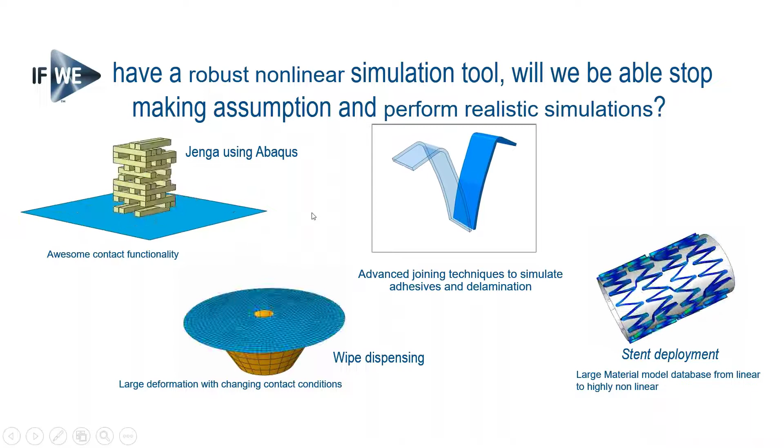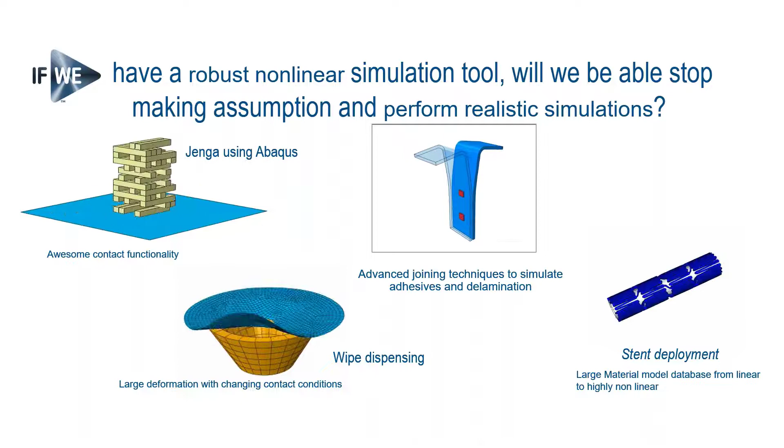The basic underlying idea here is that if we were to have a robust nonlinear simulation tool, we would be able to stop making assumptions and perform realistic simulations. Such a robust simulation tool would require extensive contact mechanics capability, the ability to deal with large deformations, and advanced material models.

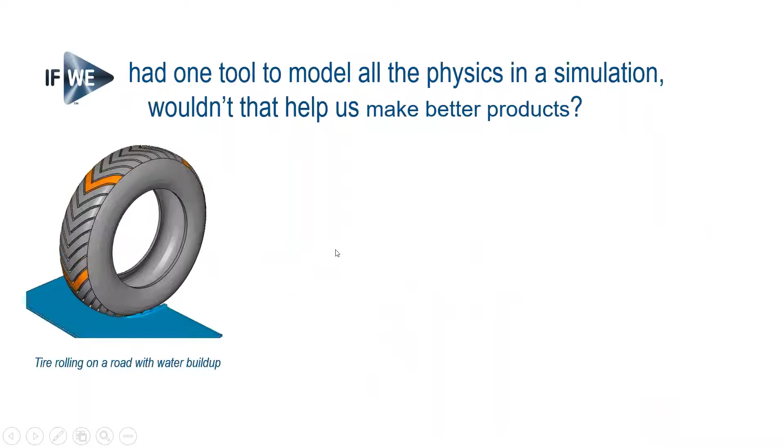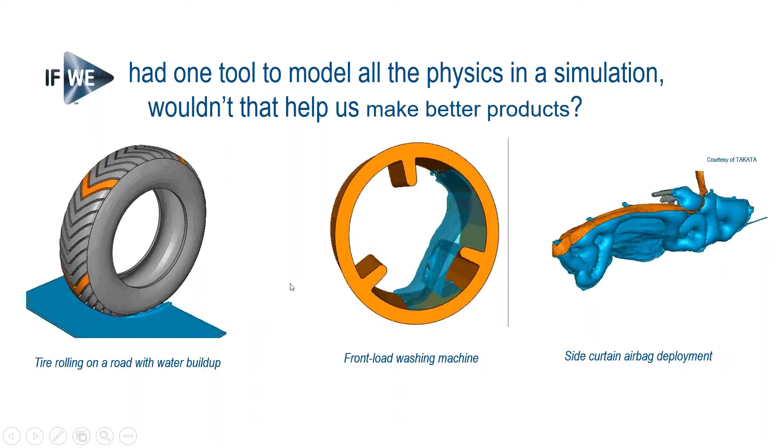If we were to have a single tool model that would also be able to incorporate all kinds of physics that our products will experience in the actual working environment, that would also help us to actually make better products.

And that's kind of the underlying idea about the activity at Dassault Systèmes. The vision, the target of our activities at Dassault Systèmes, is to make realistic simulation an integral business practice in order to explore, discover, and understand product life and nature. The aim with that is, of course, to reduce the need for costly physical testing, and for that purpose to allow us to save time and money, and more importantly, also combine that with improved quality.

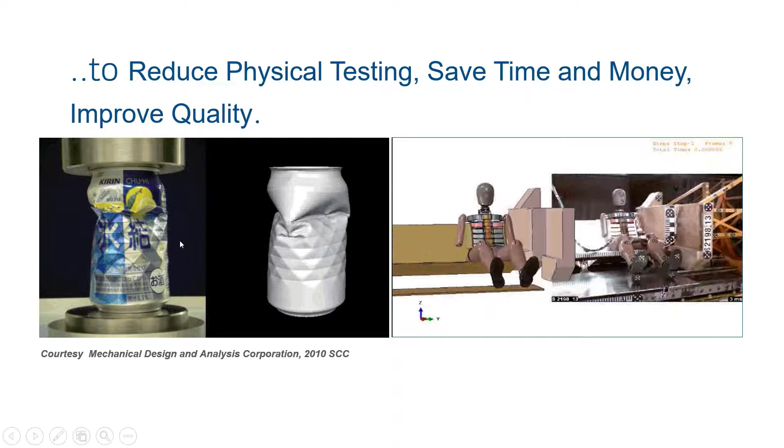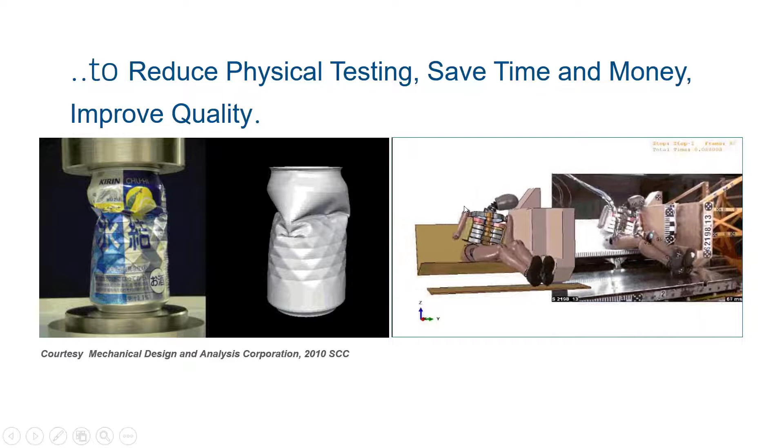What we see on the screen playing right now are a couple of examples from our customers. On the left-hand side, from Mechanical Design and Analysis Corporation in Japan, we see a comparison between a test and simulation of the crushing of an empty soda can or aluminum bottle. On the right-hand side, we see a crash dummy or side impact crash analysis. And both of these are, of course, as we can realize, tests and experiments which can be fairly expensive and cumbersome to perform.

SIMULIA, which I represent, is actually not a product or a company, but a brand of Dassault Systèmes. This brand is populated by products, which in this context are mostly Abaqus-based analysis products. We also have process management and optimization tools for managing parametric optimization. We have non-parametric optimization tools called Tosca for shape and topology optimization, and also, for the sake of completeness of product development, we have FE-Safe for assessing the durability aspect of product performance. It's actually more to it than that, but that's what we're going to talk about today.

Dassault Systèmes is a fairly big company. I'm sure these numbers are not necessarily updated, but we're more than 20,000 passionate people around the world. We're really a long-term driven company, which means we have majority shareholders that control the company, and as such we can undertake very long-term development projects. We have more than 290,000 customers around the world using our products.

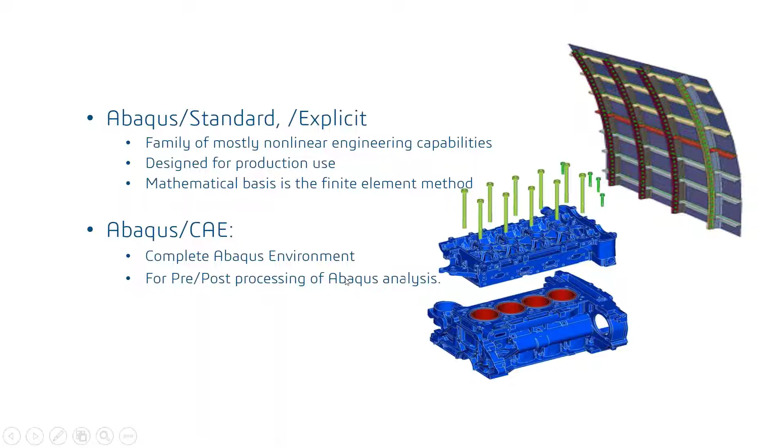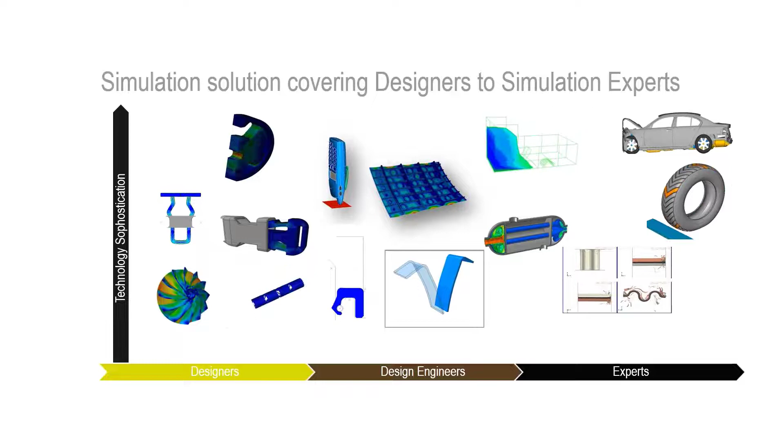We have a very good footprint across almost any industry today, which again is evidence of the generality and the quality and sophistication of the code. So we have a very comprehensive library of material models and capabilities that lends itself very well to almost any industry. I won't read them all out for you, but you can imagine that it will work for any industry that we know of today.

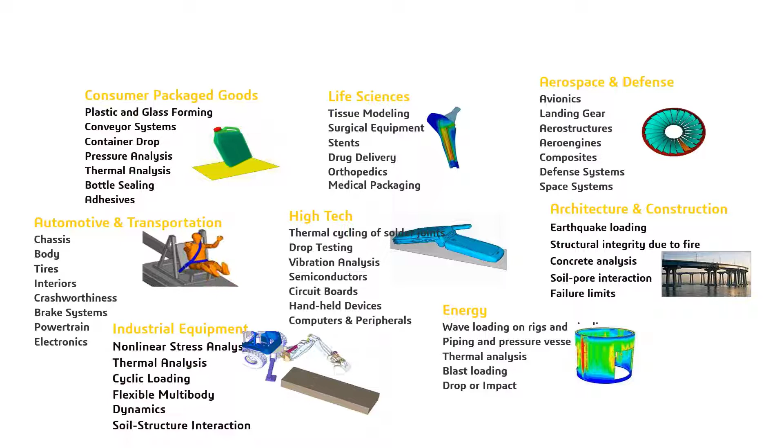So a little bit more specific then about our products. Abaqus CAE is the graphical user interface the users will interact with. It's a modular, well organized, and easy to learn user interface. It uses an object-action paradigm, navigation through a model tree. It's all fully customizable.

It's relatively new. The first version was released in 1999. This type of software takes a while to become really mature, but in terms of analysis pre-processing, it's really a very mature and capable tool that I think most of our users are finding to be a good partner in the simulation workflows.

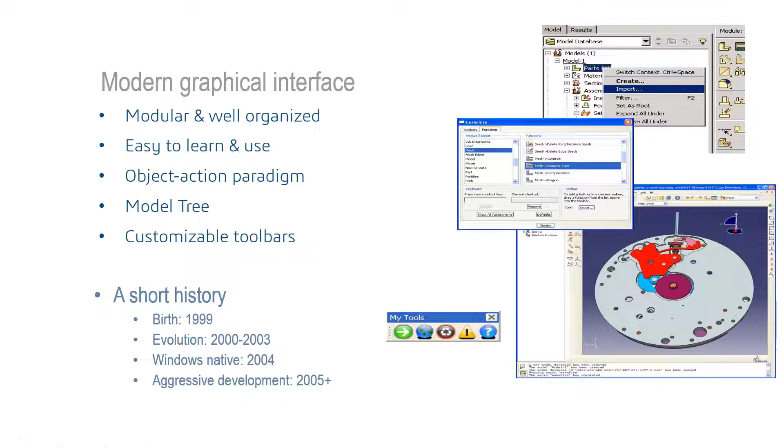Although it has a moderately competent geometry modeler in it, we oftentimes rely on powerful CAD interfaces to allow company-wide CAD geometries to be imported and potentially repaired or modified to meet the specific requirements for setting up simulations, which could be adding pieces of geometry, but it also could be simplifying, reducing undesired aspects of the geometry which don't really contribute to the value of the simulation.

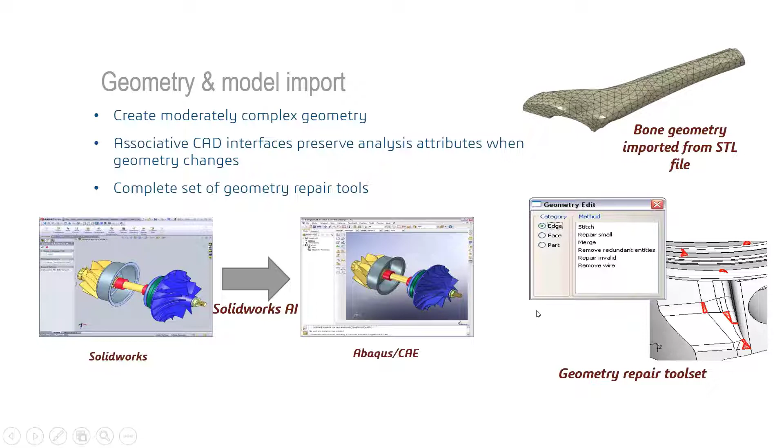Structural simulations, as we see it here, oftentimes involve, most of the time involve, meshing. So meshing capabilities are critical. For TET meshing in 3D, there is a fully automated free meshing algorithm that will mesh any geometry. We have a semi-automatic hex meshing capability that will require some amount of user intervention to split the geometry into simpler topological cells to be able to produce hexahedral element shapes, which generally are more efficient than tetrahedral elements, but on the other hand, it takes a longer time to generate the mesh.

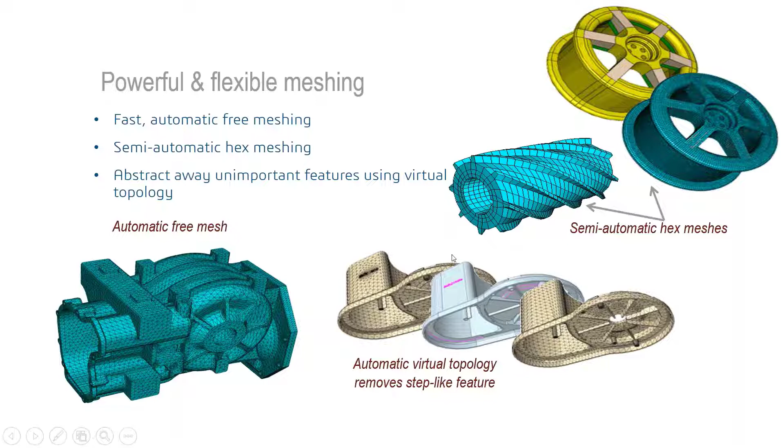Abaqus CAE also contains a powerful tool for visualization of the results, which of course is an important aspect of doing simulations. It's capable of managing large models, providing for transparency plots, view cuts, probing, animations, synchronized viewports, XY plots, and so forth. It's a very attractive way of actually presenting the results we produce with our simulations.

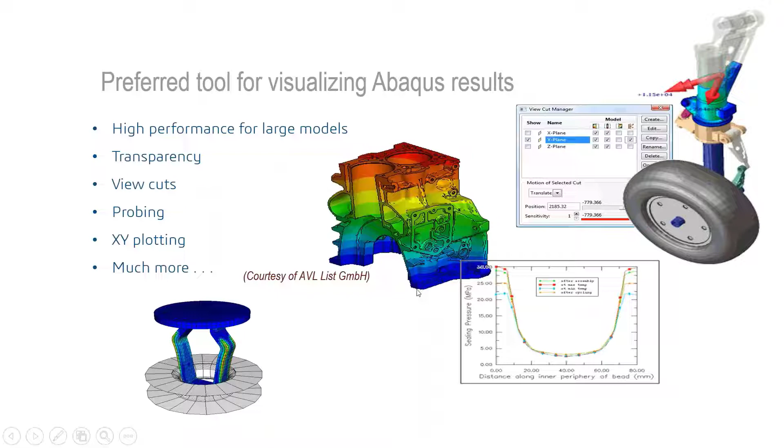It's also, as I mentioned, customizable, and we use Python as a third-party scripting tool for enhancing or capturing workflows. So the simplest way is really to use a macro mechanism. Repetitive tasks can easily be recorded with macros, which are Python journal commands from the process we are capturing, which can be edited and enhanced, of course.

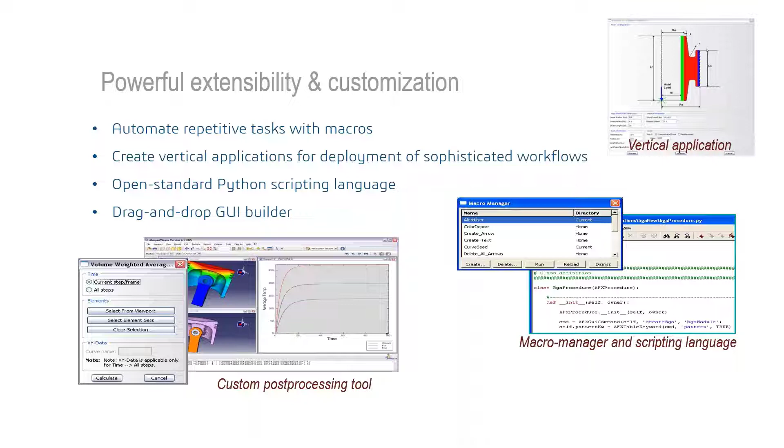We can further build new functionality, add functionality on top of existing general purpose applications. We offer an API for creating additional graphical user interfaces. The simplest one is really just an interactive drag and drop GUI builder. We call it Really Simple GUI. The user can, by drag and drop operations, create new dialog boxes which can be used to provide the user a nice interface for adding data.

As an example, we see on the left-hand side here the out-of-the-box view of Abaqus CAE. On the right-hand side, we see the Abaqus Knee Simulator, which is a customization where, as you can see, there is a knee joint for presumably an implant of some kind, where all the other aspects have been hidden, and the user of this application will only see the aspects pertinent to the current model, can edit data properties and submit simulation and immediately go to view the results.

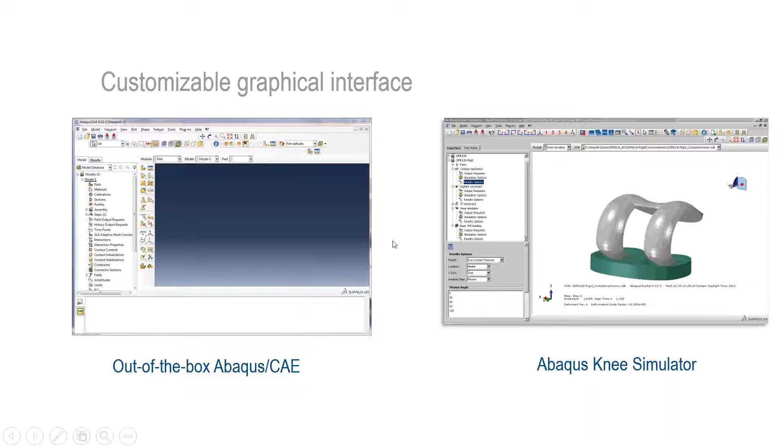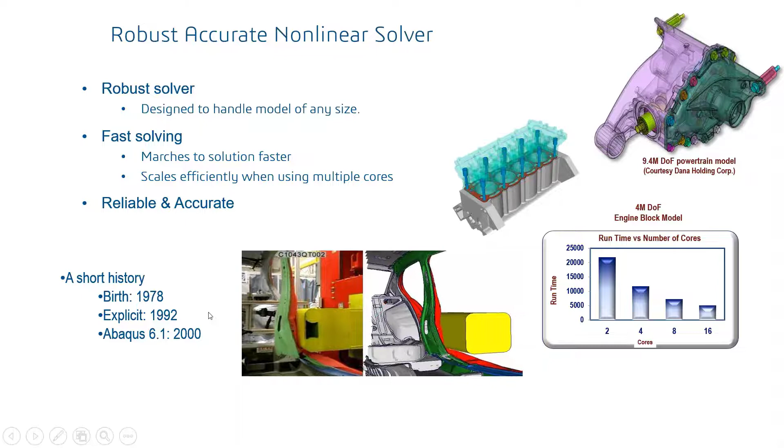So our analysis products, a little bit more in detail. We rely on robust solver technology. We constantly update the solver technology also to be effectively used in the current hardware. So there's constant ongoing work for adjusting application file databases and so forth to be working efficiently with the current hardware environment. The first version of the solver code was in 1978, and in the early 2000s we made the previous big change in code structure for allowing more native Windows applications and so forth.

This is one example of maybe one of the more prestigious customers, BMW, which since the last plus 15 years has come a very long way towards the goal to eliminate prototype hardware testing. So they assign very high quality to the predictive simulations in order to avoid having to do very expensive prototype testing. As far as I know, hardware testing in terms of crash analysis doesn't really occur until the pre-production series are available.

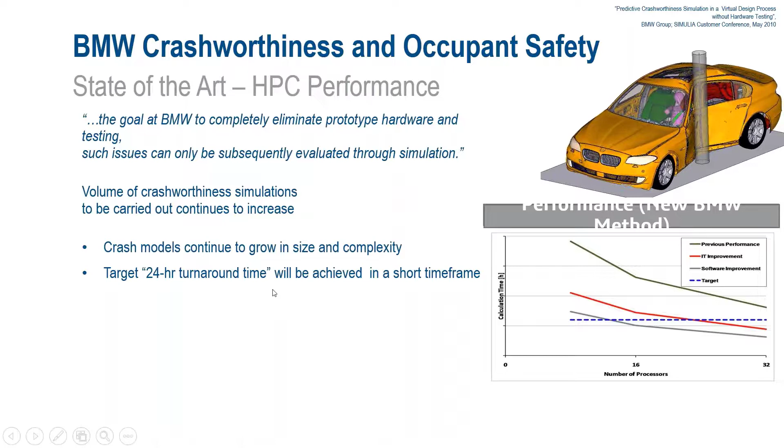Central to a powerful simulation tool is the availability of material models used in the engineering community. We have an extremely extensive library of material models, including rubbers, metals, composites, linear and non-linear material, isotropic or anisotropic.

We have dependence on loading rates and temperature dependencies, plus comprehensive offerings for modeling soils, rocks, concrete, ceramics, pastes and polymers, and strong capability within damage and failure modeling. I'll come back to that later. Importantly, these are material models - we do not necessarily provide calibrated data, which could be a challenge for advanced simulations.

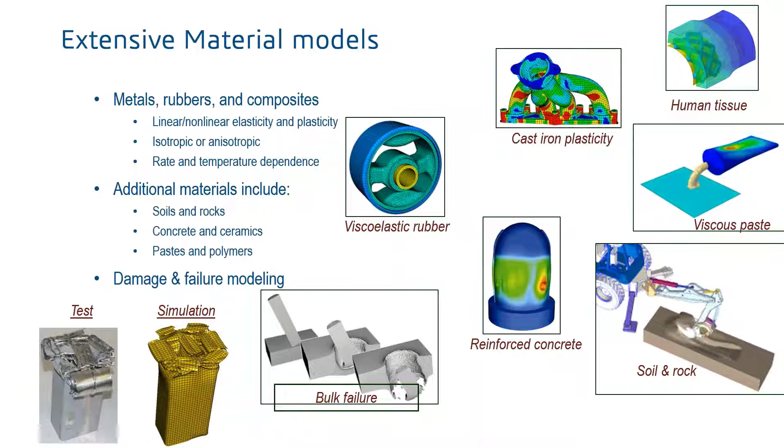I mentioned previously that we have two solver products. Abaqus Standard is not a lightweight or simpler tool in any way - it's actually the most comprehensive solver we have. It's based on an implicit solution technique, which means we can solve for pure static events as well as dynamic events. Simulations can be linear or non-linear depending on how much non-linear features we include, becoming gradually more complex. We see some examples on screen here, from classical stress analysis to mounting analysis.

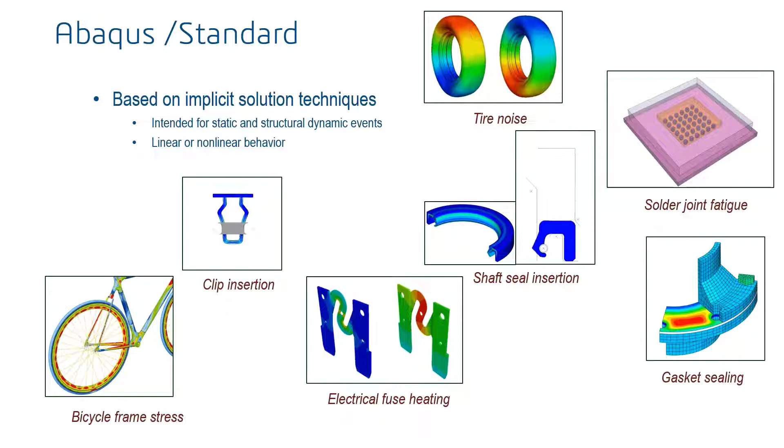Sealing analysis, noise - this involves activating acoustic fields and so forth.

Abaqus Explicit complements that. It's based on explicit time integration. This solver technology was initially intended for high-speed transient dynamic events like drop tests or crash tests, but it has also proved quite efficient for highly nonlinear quasi-static events such as rolling or forming simulations - which is why we see some of those applications on screen. But very rapid events like impacts and explosion analysis are probably home territory for explicit analysis.

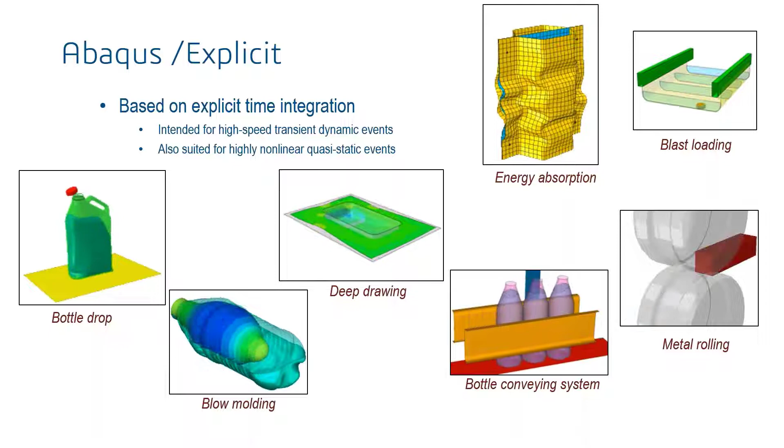Both our solvers have extremely robust and accurate contact capabilities. Contact capabilities are required whenever there's more than one part interacting with each other. From the human eye it looks trivial, but from a numerical standpoint this is a very complex aspect of simulations.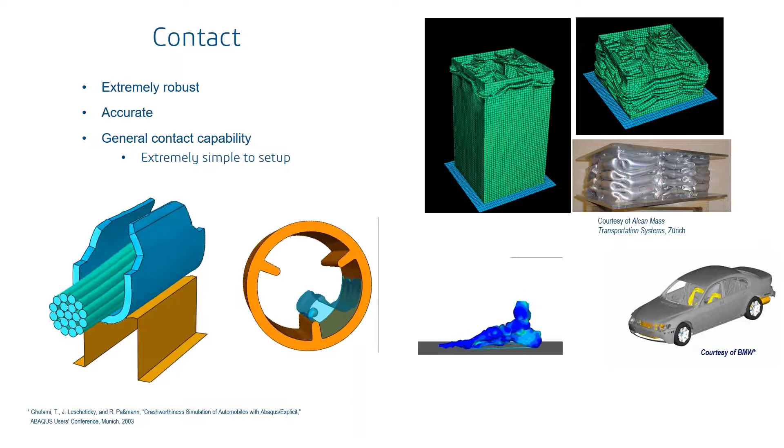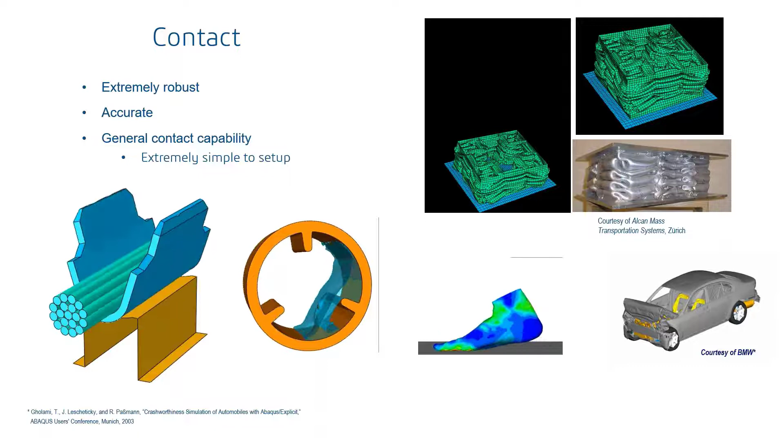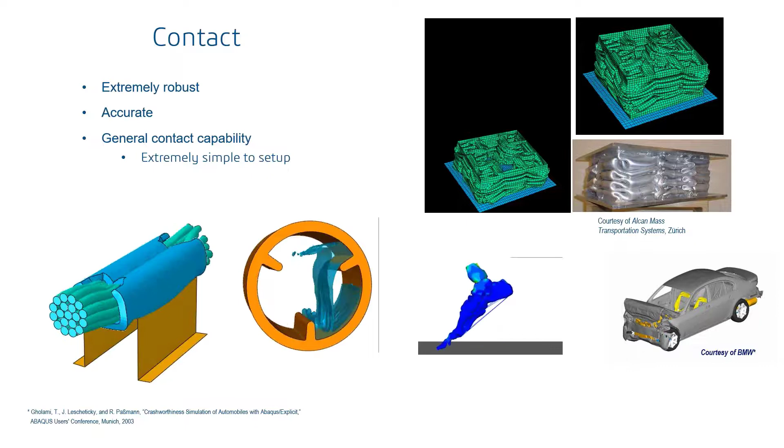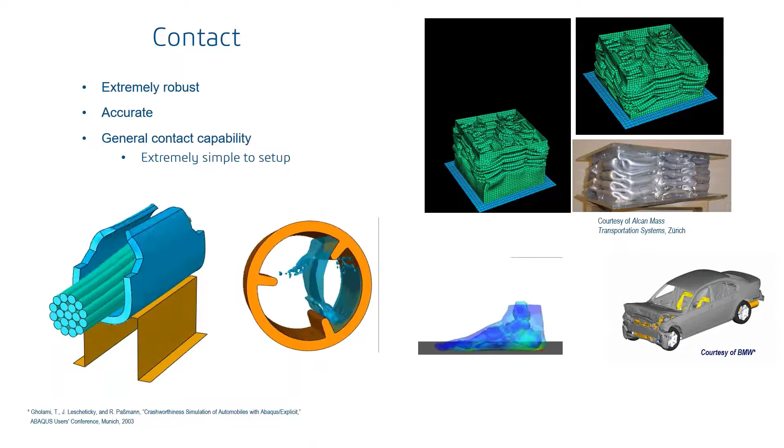Both our solvers currently use predominantly what we call a general contact capability, so the user can just ask for creating contact properties for all the exterior surfaces of geometry - that's only a couple of mouse clicks away. Then simulations can gradually be more refined by adding more complexity to the contact aspect.

Even though in a general context a lot of simulations are not necessarily very advanced, the trademark of Abaqus simulations is the capability to do what I call advanced analysis. Advanced analysis could be, for example, ones which contain multiple steps.

What we see here is a turbine or impeller that rotates at relatively high speed. The fact that it rotates at several thousand RPMs introduces centrifugal stresses which change the stiffness of our structure. If we were to do an eigenfrequency analysis of this product, we would need to take into account at what operating RPM this eigenfrequency spectra is calculated. This is an example of a multi-step advanced type of analysis.

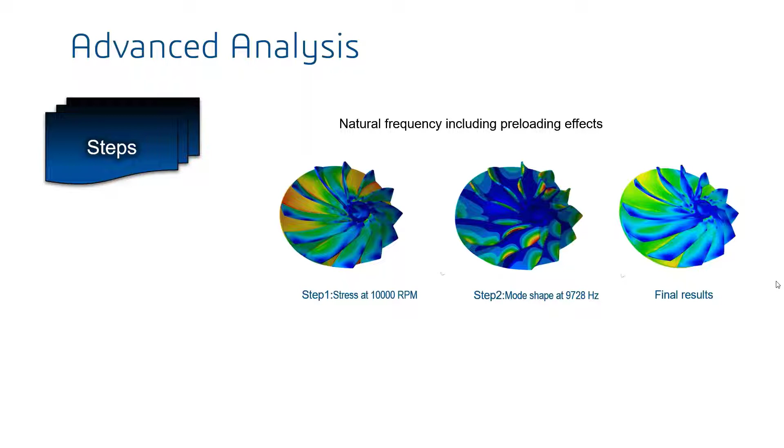This could also apply to assembly types of analysis. Whenever things are assembled with bolts and nuts, for example, we usually tighten these before subjecting our product to the service load we're interested in simulating. It's really important for accurate final results that we capture the history of events pertinent to the product life.

Another example of advanced analysis is the ability to include damage and fracture. We see here a couple of examples - on the top right-hand side we see cracks being initiated, and we see a crack propagating. We also see a picture from a test, and the simulation very accurately captures this behavior.

This is what most people are automatically assuming when we talk about damage and fracture - that things break, and we want to design away from these failures occurring. The other animations we're playing here are examples where we actually use the damage for providing product performance. Both of these are effectively energy absorbing structures.

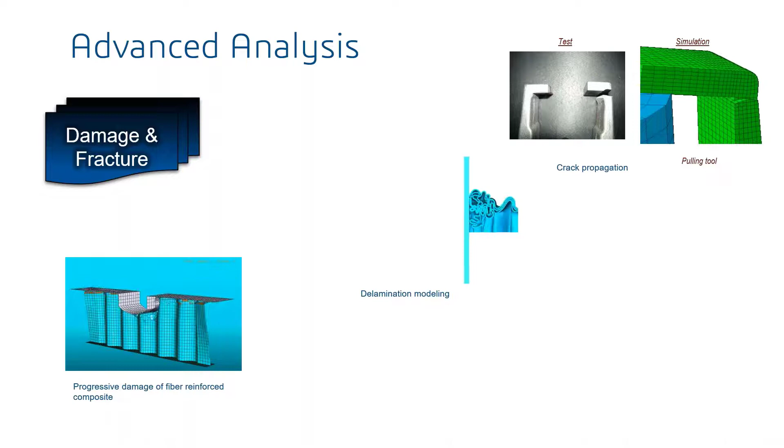The bottom left-hand side here is actually part of the structure of a helicopter seat. In the event of a crash, we want to protect the passengers and pilots from too severe an impact. So there's a composite structure designed to break, but also at the same time dissipate energy to mitigate the impact effects on the passenger on the seat, which we don't show in the picture here.

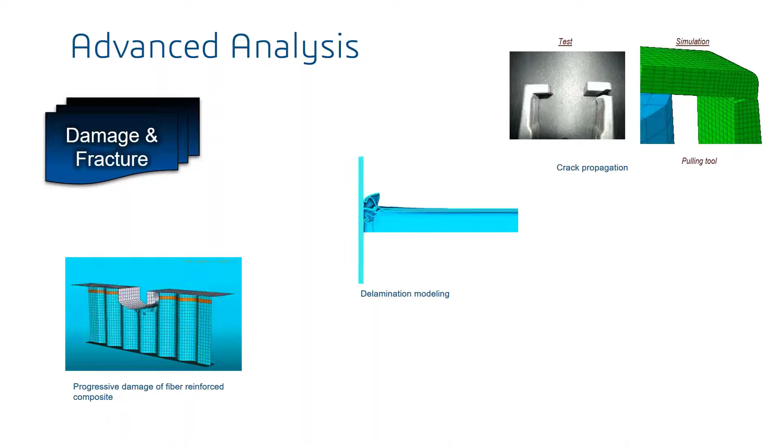Packaging industry is another example where simulation of the opening mechanisms of consumer packages is relevant, where damage and failure are part of the product performance. We want the package to open nice and smooth when we try to open it, but we want to avoid the package coming open when we drop the juice package, for example.

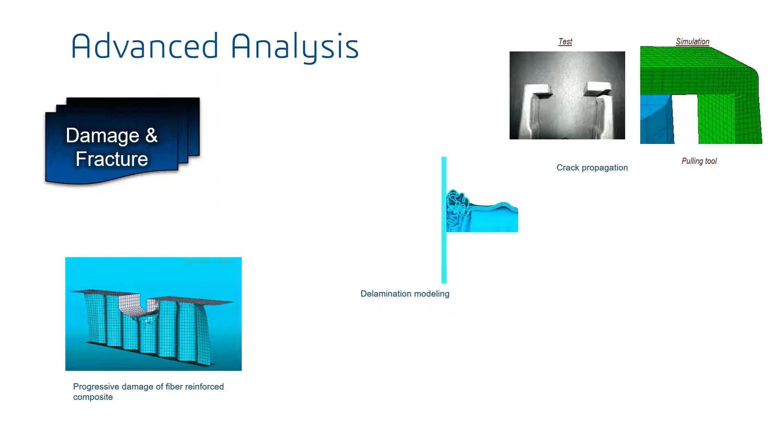Other advanced types of analysis include the capability to simplify away some of the contact analysis by introducing connector elements. For system level analysis, it might become unnecessarily expensive to do full contact analysis between each and every part, so we can save simulation time by abstracting away some of these contact aspects with two-point idealizations.

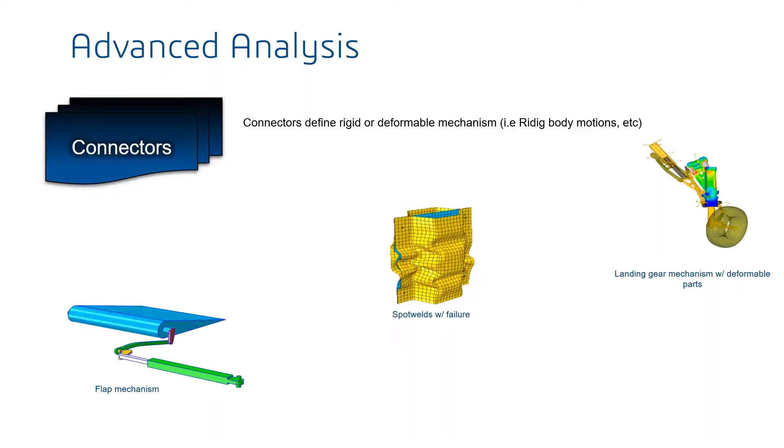Multiphysics analyses are also part of advanced types of analysis. What we see here are multiphysics in the sense that we involve more than one physical field, so thermal mechanical, for example, it could be structural acoustics, or it could be thermal electric. There are multiple variants of multi-physics simulations available on the SIMULIA platform.

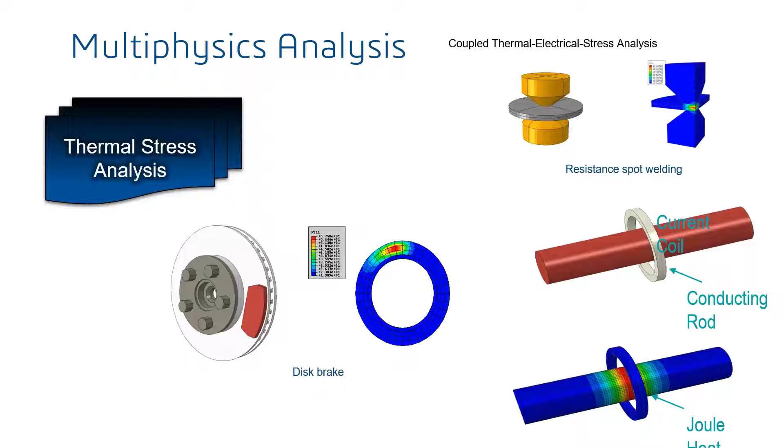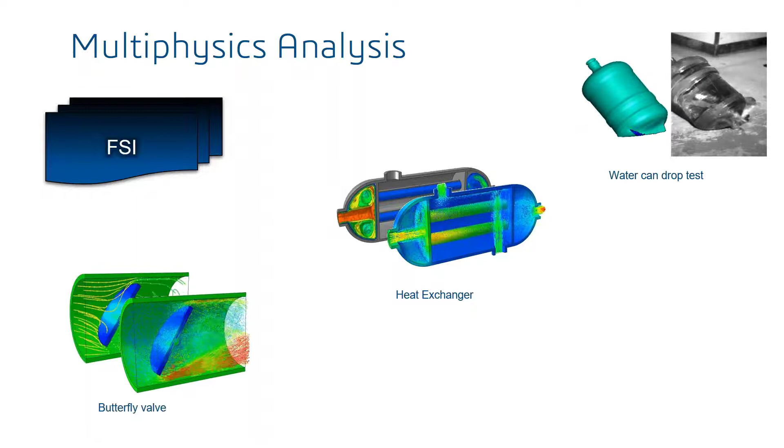Fluid structure interaction is also an example of multi-physics simulation. This is where there is fluid, could be a gas or water as we can see on the top right hand side, interacting with the structure, and we need both fields to accurately compute and simulate the product behavior in its real environment.

There are multiple ways of doing this type of multi-physics simulation. In particular, I want to highlight what we call native multi-physics simulations. These are examples of simulations done entirely inside Abaqus, not necessarily having to involve an external fluid solver. For these purposes, we have Eulerian formulations, or we have particle methods. They both offer similar types of capabilities, but they have pros in different fields of application.

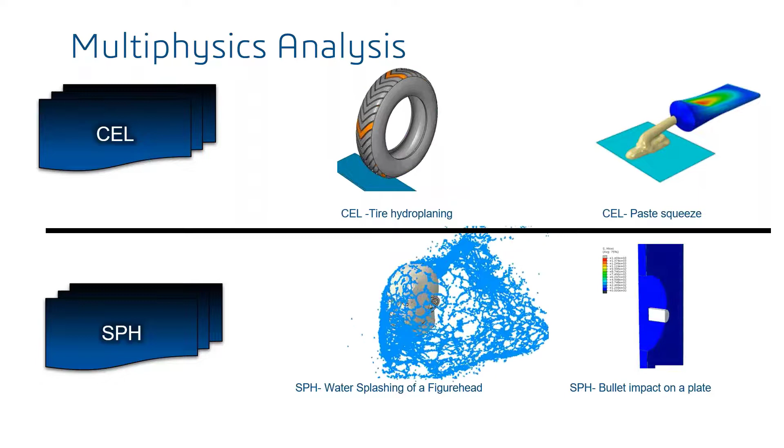Another field in which we have invested a lot of development over the last few years has been providing simulation technology for additive manufacturing processes. This is a relatively new manufacturing technology which attracts a lot of interest in many fields of industry. In terms of structural simulation or thermal simulation, there are some significant challenges here.

I talked initially about meshing of our components. The challenge here is that we are actually adding material gradually throughout the simulation. We facilitate that by progressively activating the elements, so we actually create elements which are initially empty, and then we have a mechanism that will add material into the empty elements.

For providing the thermal part of the simulation, we also have added the capability to include moving heat sources. It could be the welding torch, or it could be the laser beam, that follows a predetermined path through the simulation domain.

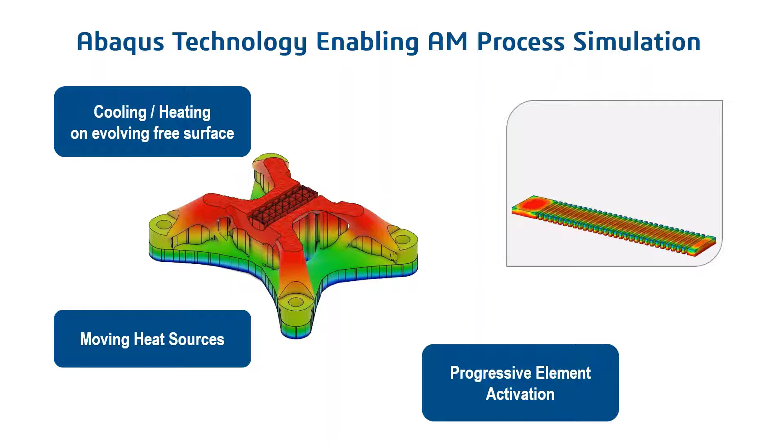With that, I'm going to focus a little bit on some of the other products on the SIMULIA brand.

One product on SIMULIA is called Isight, and that's really a process management and optimization tool, which you can think of as being a software robot. It has a nice drag and drop GUI that will allow us to run different applications, as we can see examples here of Excel, Abaqus analysis. We can run our own scripts, process some of the output from one program, execute, and export some results for evaluation or further processing.

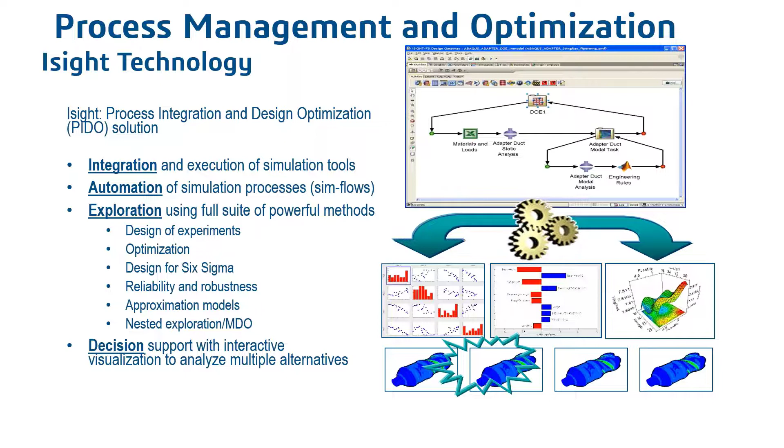And once we have that loop, we can create optimization loops or reliability and robustness studies. This could be a great tool for helping out on taking decisions, so we can do trade-off studies and compare multiple different alternatives for product design.

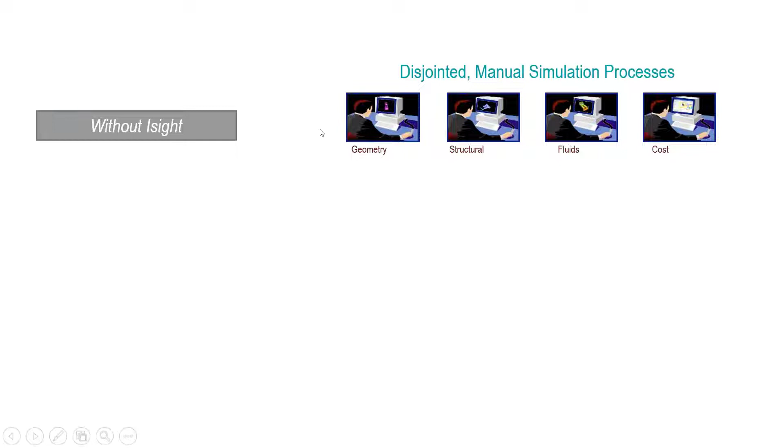The target with Isight is that we oftentimes see that a classical environment currently has geometry creation, with a manual handover to a team doing structural simulations, and at the same time also fluid simulations, which is a cumbersome, error-prone, and slow process. But by wrapping Isight around all these different applications, we can streamline and automate the process and speed up the entire simulation loop.

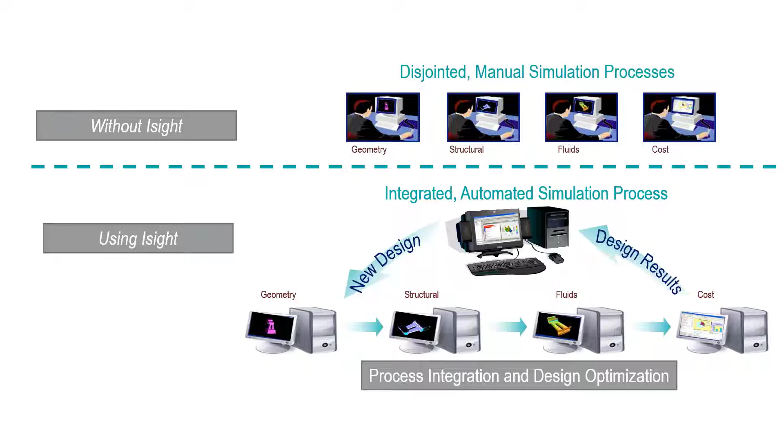So this would represent parametric optimization. Another product portfolio that we have is Tosca. So Tosca is sort of the non-parametric optimization aspect of simulation.

It has different capabilities, including topology optimization. For those of you not familiar with that, this is a capability where we provide a design space with material, and then the solver figures out how to remove material with low stresses, while respecting design constraints on deformations and stresses.

Sizing is a capability to work with shell structures to reduce mass through optimizing the sheet or shell thickness to meet certain design criteria.

Shape optimization often comes in association with topology optimization. It allows for minor tuning of surfaces like fillets to reduce local stresses, usually for the purpose of increasing durability or fatigue life of the product.

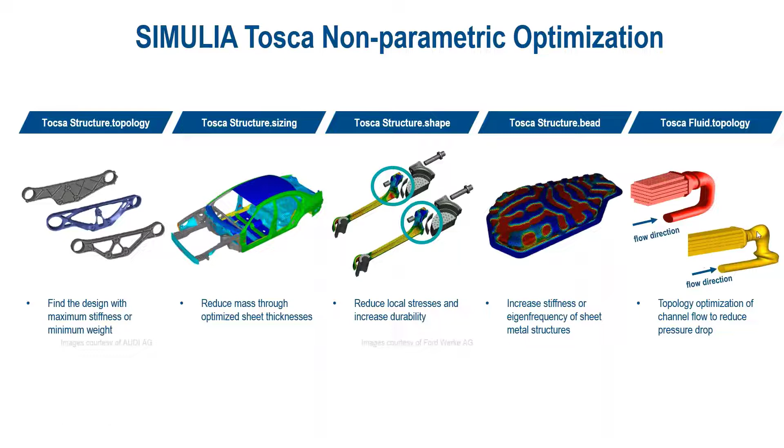FE-Safe is also available on the SIMULIA brand. It was initially an acquisition from Safe Technology in UK. FE-Safe allows us to read results from our structural simulations and potentially multiply them with some loading history to do multi-axial fatigue analysis of the entire finite element domain.

In many industries, fatigue can be critical in terms of design. In particular, the more you use topology optimization and that kind of tools, there will be less margin on fatigue aspects, so it's becoming more important to take that properly into account.

So this adds on to our simulation results. It can operate on the Abaqus results databases, and it can write your fatigue life and attach it to your strength and simulation results on the same database for visualization.

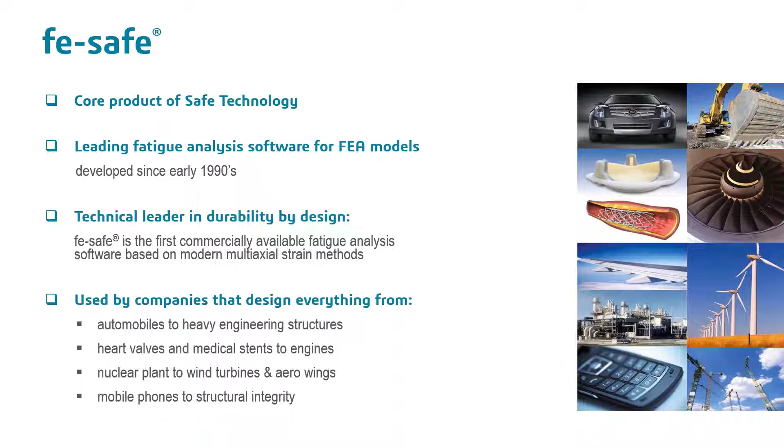So I will round off this presentation by talking a little bit about some trends in terms of applications I have noted with Abaqus usage over the last few years. Clearly one of the things we see is an increased use in topology optimization, which can be accessed directly from within Abaqus CAE.

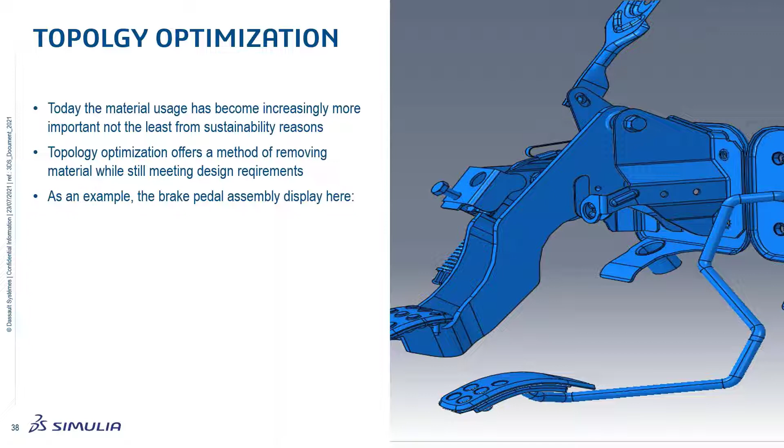This is an example of the pedal assembly from a car. We take the brake pedal here, and we want to explore how we can make this as light as possible, but still meeting the functional requirements. So we isolate that part.

This is taken directly from the preprocessor. We have some attachment points, and you can see there are some partitions over here which will be frozen. These will have to be fixed because they represent connections to the rest of the pedal assembly.

The brake pedal itself, where you put the foot, is where the load comes in as well, and it will obviously be a frozen region. The rest, indicated by these green glyphs, represents the design domain - feasible locations of material.

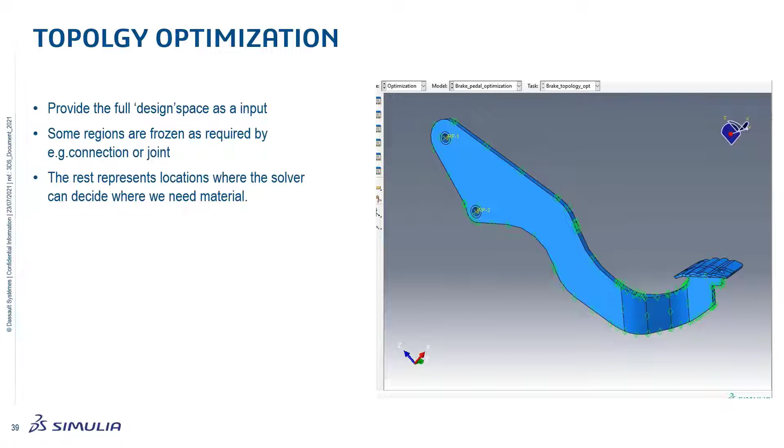Then we can kick off the simulation. What we see here is an animation of how the topology optimizer finds the solution through multiple runs and iterations, where we remove material, rerun the simulation, and re-evaluate it with the constraints in terms of deformations and stresses.

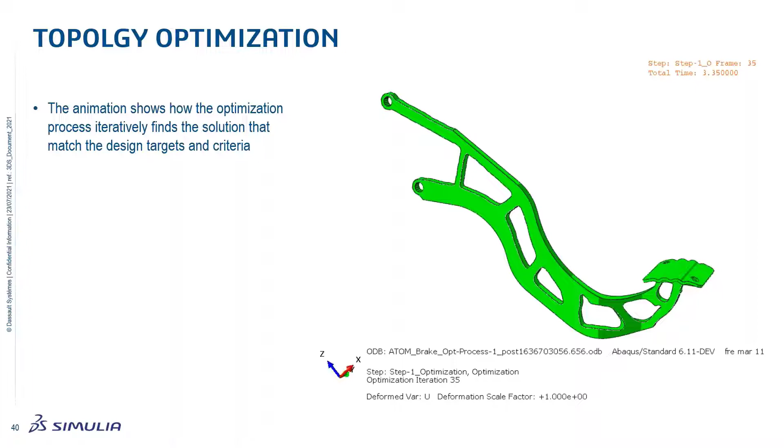So this, of course, results in significantly less mass than the initial proposal.

I also see a strong trend more recently to take simulation one step further, to also include the manufacturing simulation and manufacturing history into the picture. This is particularly important as we see a shift to new materials and new manufacturing processes. 3D printing is one example. Composites, for example, are also often tightly integrated with the manufacturing process, whether it's actually producible at all or easy to produce.

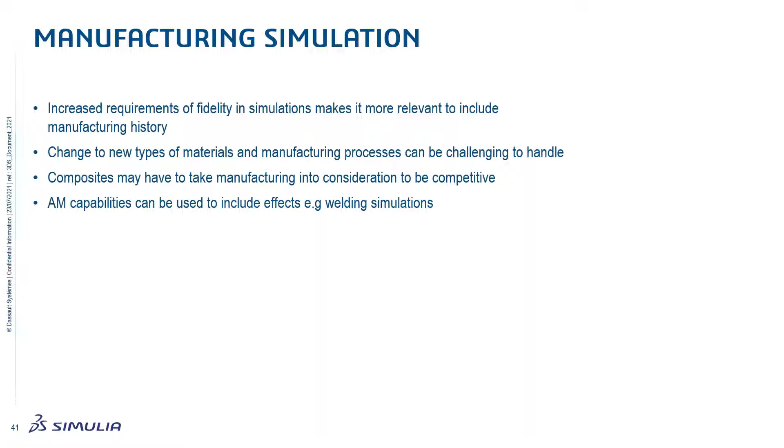In that context, we also invoke or develop a number of multi-scale simulation methods. This offers a capability to extend from the macro scale continuum mechanical level into the microscopic level, taking into account the constituents of the components. If you have concrete, it's cement, rebars and rocks, or any type of composite for that matter. So we have offered different techniques to facilitate what we call multi-scale simulations, which is becoming more common among our customers.

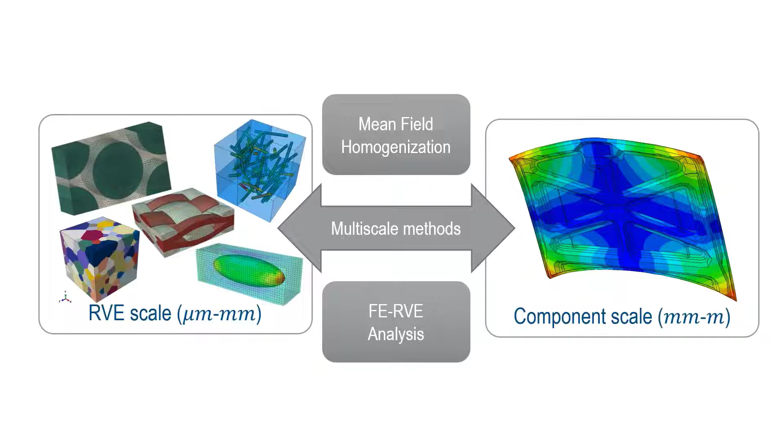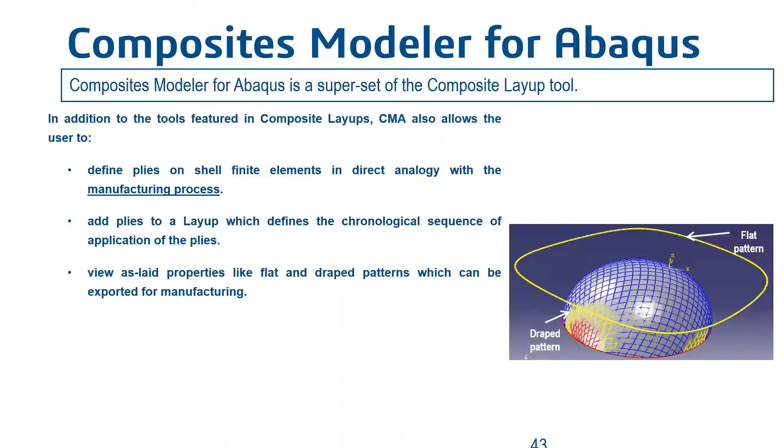I also mentioned composites, where the manufacturing process is tightly integrated with the ultimate product performance. There's an add-on capability inside Abaqus CAE to allow for modeling of the manufacturing process of the composite, so we can see how fiber orientations evolve as we do the draping. We can change the initial orientation of the plies as we apply them to facilitate the desired properties at the end of the day. It can also explore whether we can actually produce it, or if we need to introduce some splits. You can imagine the analogy of wrapping Christmas presents, whether the paper will wrinkle or not. These are things we want to avoid when producing composite plies.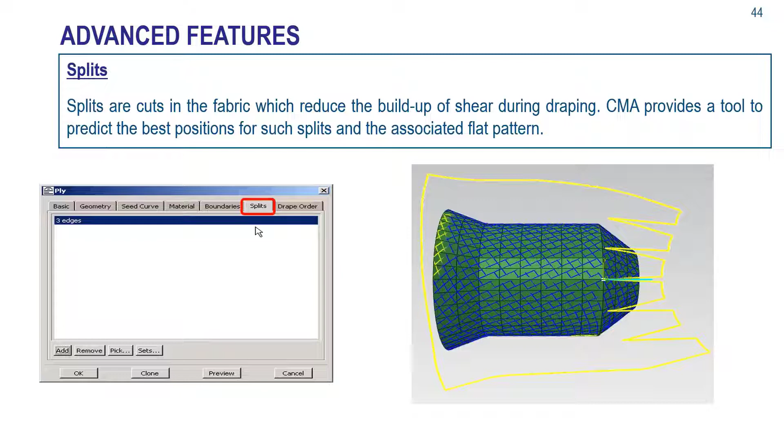I also mentioned additive manufacturing previously, to include welding in the simulation history of our products. Welding is widely known to produce a problematic amount of residual stresses because of the thermal history. The capabilities we have for additive manufacturing lend themselves very well to high fidelity welding simulation. We can use that framework to add the material representing the weld material, and add heat following a predetermined path. As such, we can make a much higher fidelity prediction of product performance, because this residual stress is oftentimes the result of the welding simulation. It interacts with the fatigue life, for example, or potentially the distortions. Once this thing cools down, anyone who has tried welding knows it's fairly common that these products actually distort when they cool. These kinds of things can be captured by including this in the simulation history.

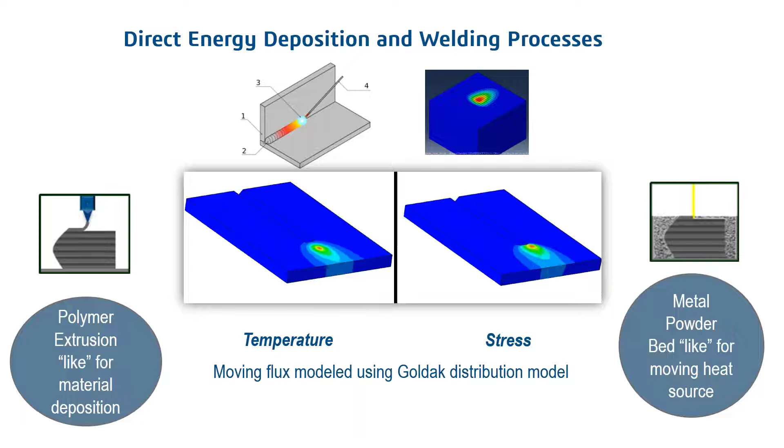So I think this concludes the overview of what we can do with simulation, and hopefully we all realize that a lot of these things are necessary for us to further improve product performance and become more efficient and more economical. We need both linear and nonlinear behaviors oftentimes in the simulation world. To do real product life simulation, we rely heavily on advanced contact and material modeling. Models tend to become large, so high performance solvers and multi-core simulation execution are required. We can use Abaqus CAE to integrate with CAD packages, customize and capture repetitive and routine tasks, and also provide advanced workflows for less sophisticated users. So it's really a single solution for all analysis needs.

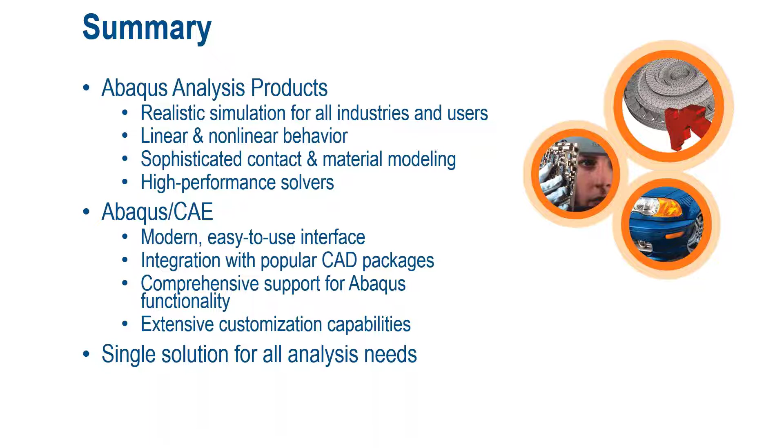Thank you, Jan, for a great presentation. Very exciting software. There are actually a couple of questions here, if you have time for those.

What different CAD models can be imported into Abaqus? We have neutral CAD formats like STEP and IGES, if you will, but it's most of those formats. We have direct interfaces to SolidWorks, CATIA, and to Pro Engineer. We also have associative interfaces, which are more intelligent than the neutral CAD formats.

Another question: can material test data be automatically calibrated? That's another interesting thing, because for advanced analysis we often rely on advanced material models. For example, it could be metal plasticity or rubber-type material like hyperelasticity. For hyperelastic and metal plasticity materials, there is a built-in calibration tool that allows the user to feed in test data, which would normally be a tensile test or the equivalent, and we can calibrate coefficients or properties for the mathematical models in Abaqus for you. It's not currently fully available for all types of materials, but for hyperelastic and plastic materials, we have that.